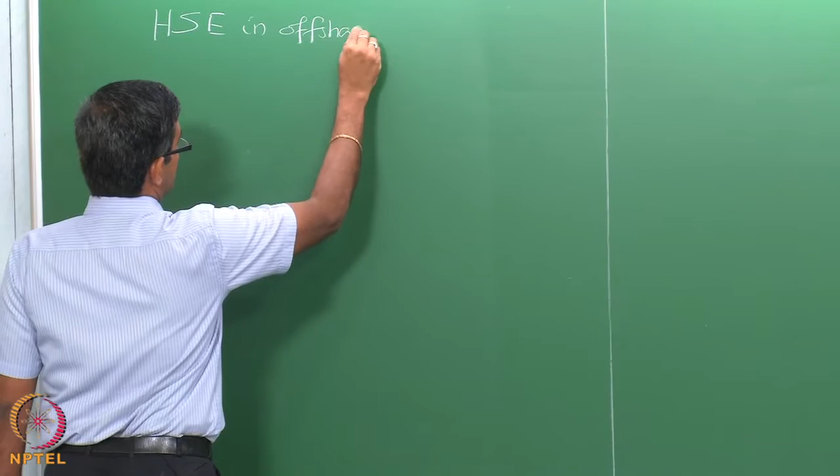Welcome friends, we are discussing the online course titled HSE, that is Health, Safety and Environmental Management in Offshore and Petroleum Engineering. We are now discussing through module 1, where we are going to discuss in detail the environmental impact caused by offshore and petroleum industries.

So, environmental management, in lecture 3 today we will talk about the consequences which essentially come from drilling accidents and how the drilling discharges can disturb the ecosystem balance in marine environment.

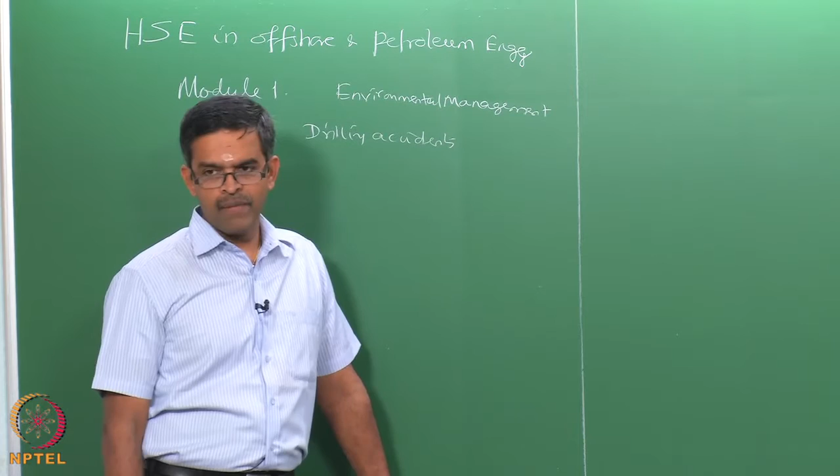In the last lectures we already saw various factors which actually affect the environmental impact caused by the activities in offshore and drilling fields. We have already discussed the different stages in drilling, exploration, production, etc., how in different stages we can have environmental impact caused to the marine ecosystems.

Now, to be very specific, let us now see how the drilling process alone can focus on the environmental issues or impact caused to the ecosystems.

Drilling accidents of course occur due to unexpected events. We know that drilling accidents are unavoidable. We can say they are unintentional. In real sense, they are actually accidents.

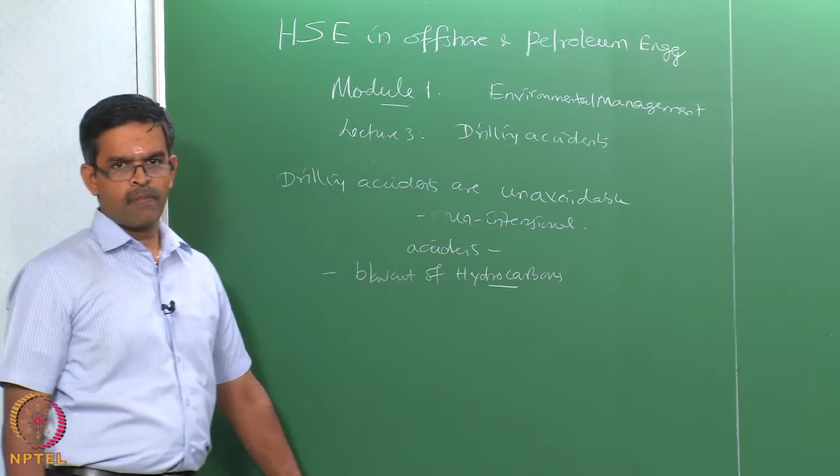But essentially they result in heavy blowout of hydrocarbons from the well. Of course, hydrocarbons and liquids, let us say, from the well. To be very specific, from the drilling wells, and the main consequence of such blowout is they result in very large oil spill.

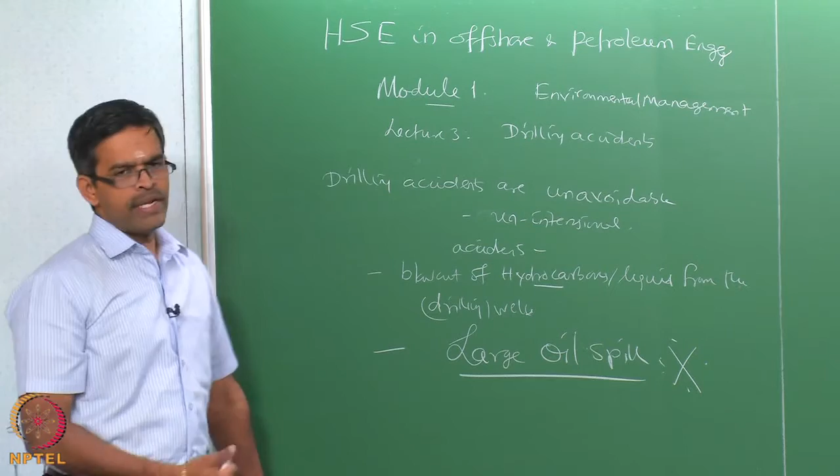That is one of the important consequences which arise from drilling accidents. Very interestingly, the literature data shows that one of the major accidents which is still being spoken of in the oil and gas industry, one of the major accidents which occurred near the shore of Mexico, in as old as 1979, was the blowout of the rig Ixtoc 1.

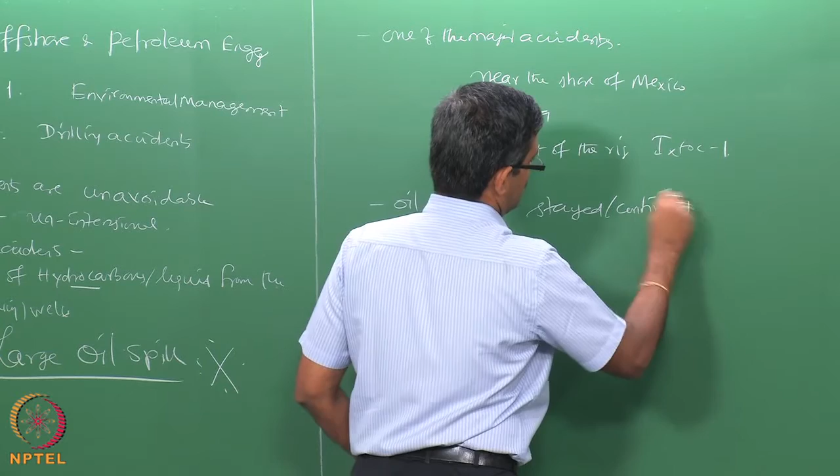The interesting fact, as you will be reading from the open domain sources, is that the oil spill resulted from this specific blowout stayed there, or let us say continued, for about 10 months. That is fairly a large period, and the quantity of oil which spilled out is about 3000, and somewhere the concentration is as high as 6000 tons.

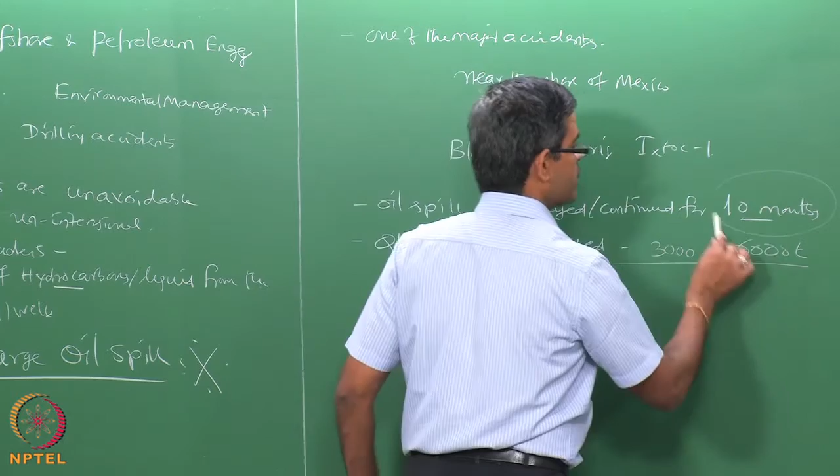So, one can seriously see the quantitative impact caused by such blowout accidents and the period with which it affects the ecosystem. So, both of them are equally important for us to really know the seriousness of any such consequences which occur from drilling accidents on offshore environment.

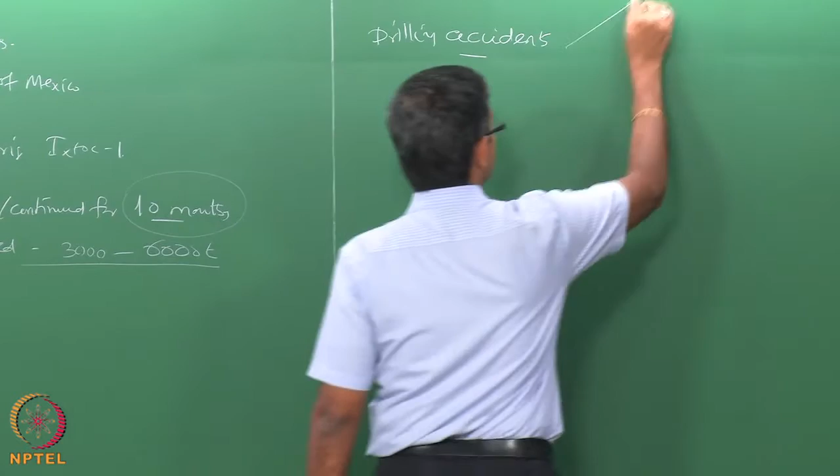Now, to understand this further better, let us classify drilling accidents into two parts. So, drilling accidents can be classified essentially into two parts: Class 1 type and Class 2 type.

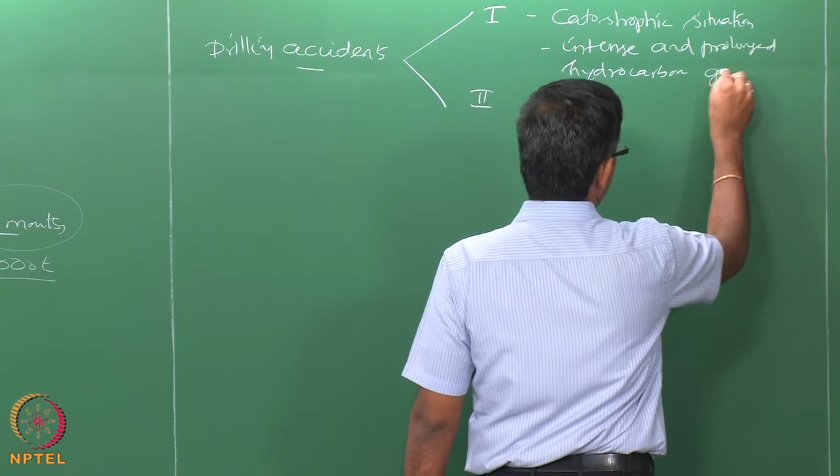Class 1 type actually refers to the catastrophic situation which involves very intense and prolonged hydrocarbon discharge. Let us say gushing. Gushing is a phenomenally high discharge.

The second class actually refers to a routine hydrocarbon spill. This essentially comes out during even the normal drilling operations. This is very common even during normal drilling operation. There is no reason that it should always happen only as an accident.

Therefore, the second class of drilling accidents is generally not frequently reported, because it is more or less a routine part of the offshore industry process. Moreover, it is also not responsible for causing serious pollution. So, they do not cause serious pollution.

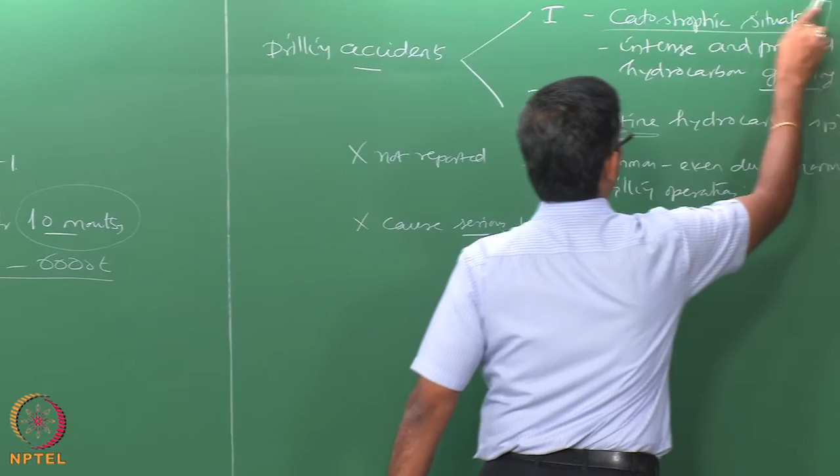So, we are more bothered about the intense and prolonged hydrocarbon gushing, which actually results in a catastrophic situation. So, when we say drilling accidents, we refer to type 1, or classification 1, of drilling accidents.

The next important source which actually causes imbalance in the ecosystem is accidents caused in underground storage reservoirs. We know offshore platforms are built for various purposes. So, offshore oil production systems, or let us say offshore platforms, are built for several functions.

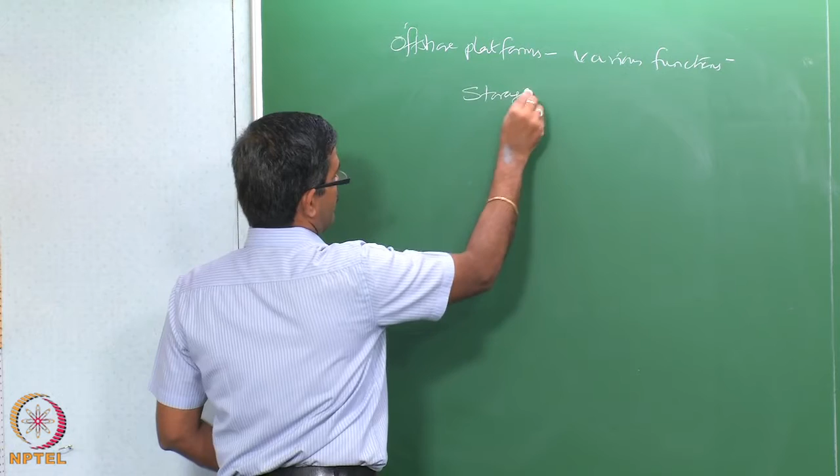Storage is one amongst them, but storage, if it is a part of the function of the platform, requires a lot of reserve space. Due to limitation in the reserve space available in the platform, especially in production platforms, in drilling and production platforms there is generally a limitation in storage space.

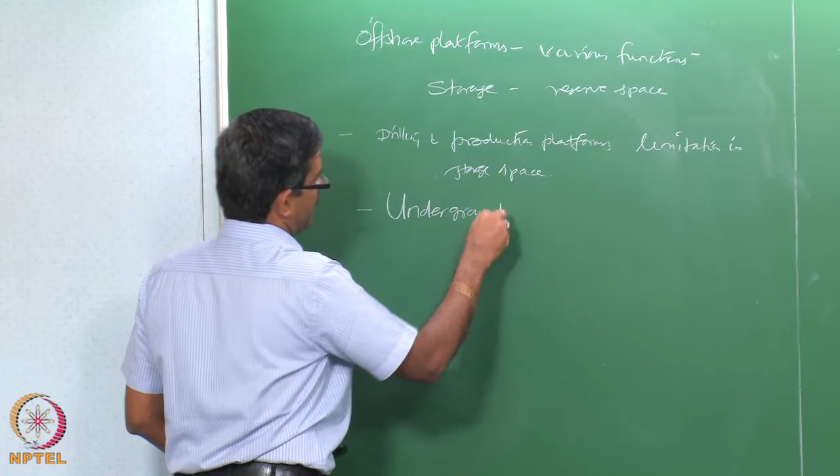So, to overcome this difficulty, people construct what we call underground storage reservoirs. Large tanks are constructed, which are actually commonly used in the present terms, because in the present scenario the production and drilling platforms, which are essentially semi-compliant in nature, have a serious limitation in terms of storage space. So, there has been an improved usage of underground storage reservoirs.

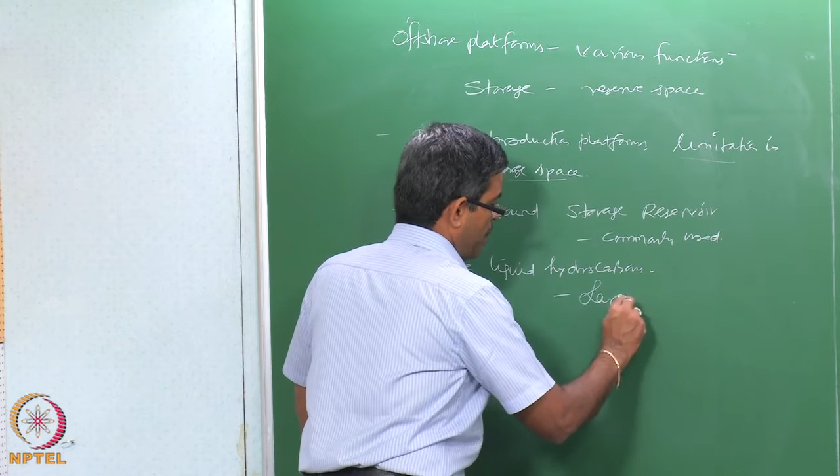So, essentially these reservoirs are used to store liquid hydrocarbons. They actually store liquid hydrocarbons. There is no harm in allowing them to store the hydrocarbon. The difficulty here is they store them in comparatively a large volume. That is the problem here.

They are used when tankers are deployed for oil transportation instead of pipelines. So there are two ways you can transport oil from the production platform to the shore for processing: either you use pipelines or shuttle tankers. Essentially, underground reservoirs are used wherever people generally use oil tankers or shuttle tankers instead of pipelines.

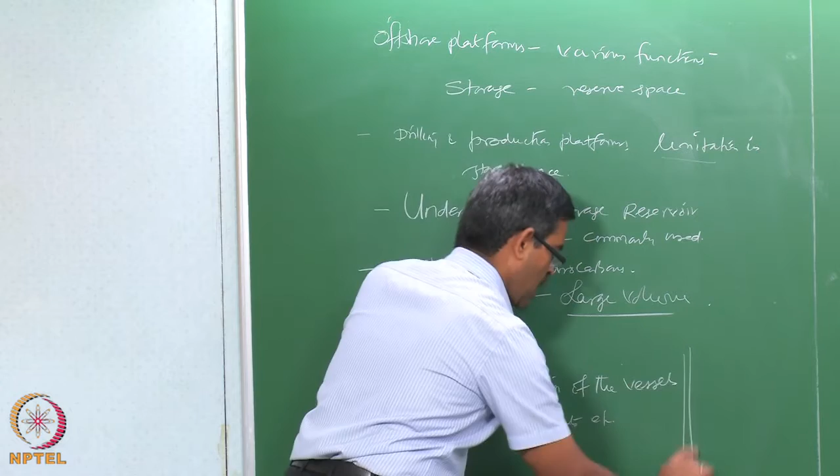Now, where do the risks arise when you use underground reservoirs? The causes for risks can be, one, due to collision of the vessels, that is the shuttle tankers, with the reservoir. There can also be collision caused by tugboats, etc. The occurrence of these kinds of incidents in the offshore industry is comparatively high.

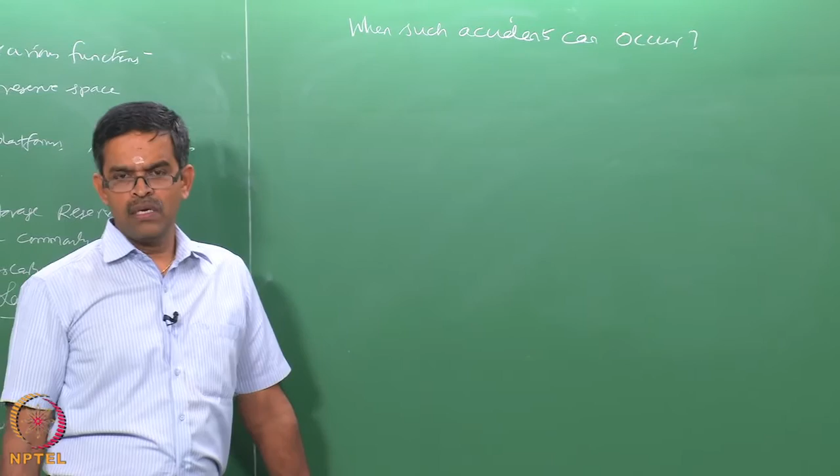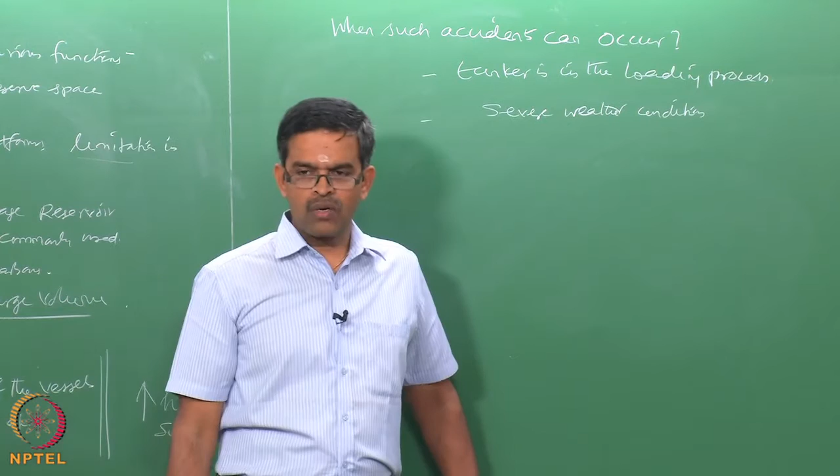Now, the question asked very commonly is, when can such accidents occur? The answer is simple. Such accidents usually occur when the tanker is in the loading process, or alternatively when there is severe weather condition, because during the loading process the tanker has to be enabled to come as close as possible to the reservoir.

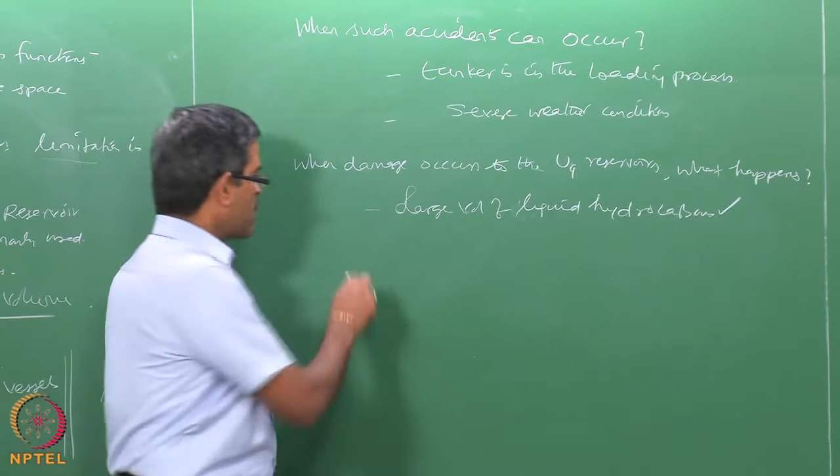Now the question comes, when damage occurs to the underground reservoirs, what happens? That is what we are interested to know. As I said in the beginning, underground reservoirs have a very large volume of hydrocarbons. So on damage, they will become a concentrated source of marine pollution.

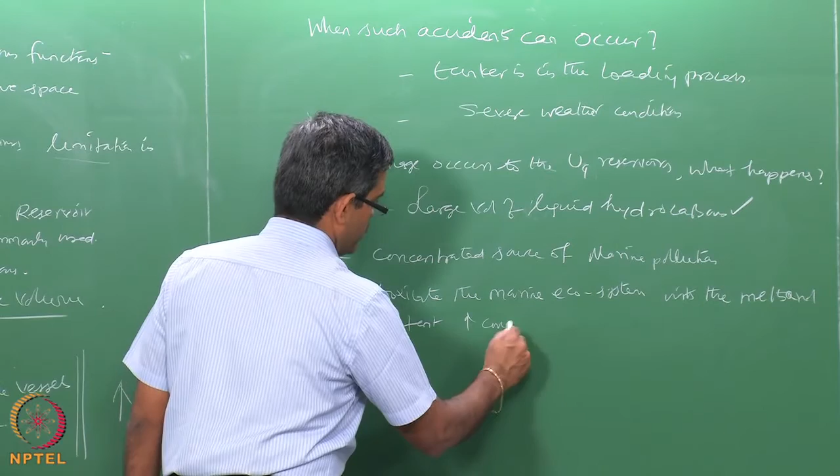Because this will toxicate the marine environment or marine ecosystem with high concentration of hydrocarbon content. That is one bad news.

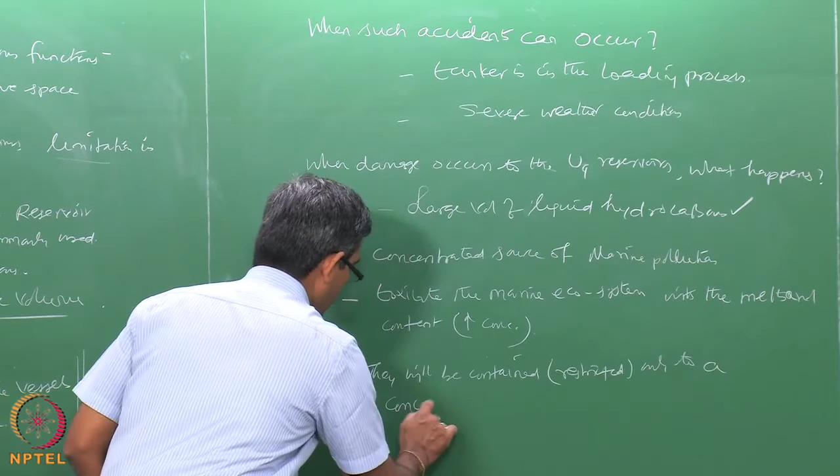Now there is good news here. The good news is they will be contained or restricted only to a concentrated area. They will not spread easily.

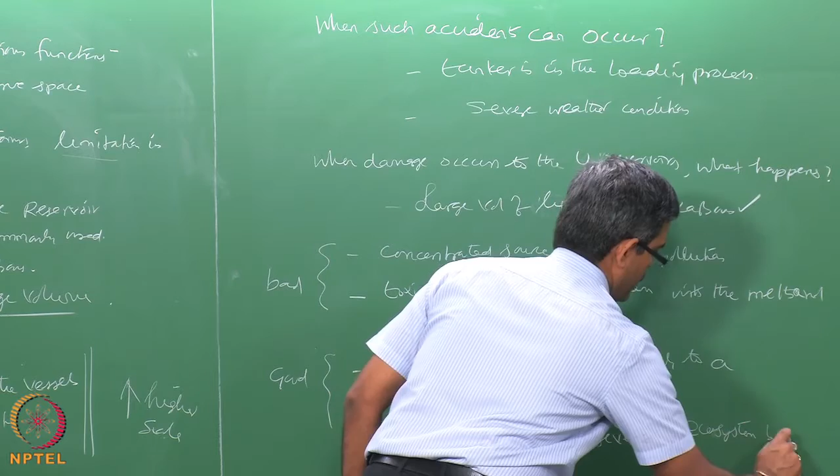But however, the extent of this pollution spread may not be large, but the concentration of pollution in that area will be very severe, which affects the ecosystem very badly. So therefore, it is a matter of concern for all environmentalists.

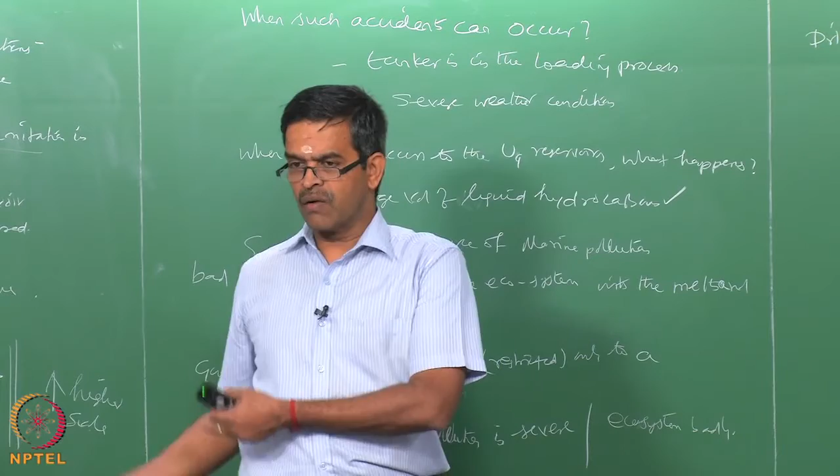Alternatively, you do not allow the shuttle tankers to transport oil from the underground reservoirs to the onshore for processing and discharge. Let us say I am using pipelines instead. Now let us see what are the consequences caused when you use pipelines for transporting oil from the underground reservoir or from the production platform to the coast.

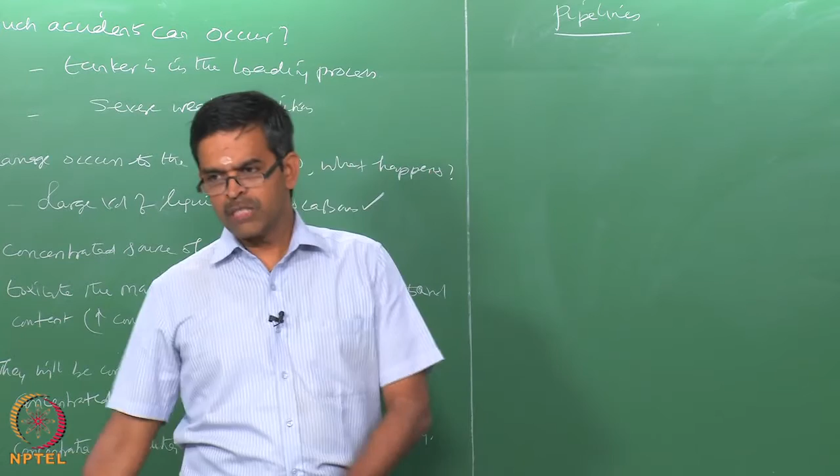They are also hazardous; they are not hazard free. Pipelines are generally used to transport the explored crude oil to the shore for further processing. We all know crude oil cannot be used as a commercial product, you need to process that. So you transport the explored crude oil from the production platform, because you cannot do the processing on the production platform itself, since space availability there is highly limited.

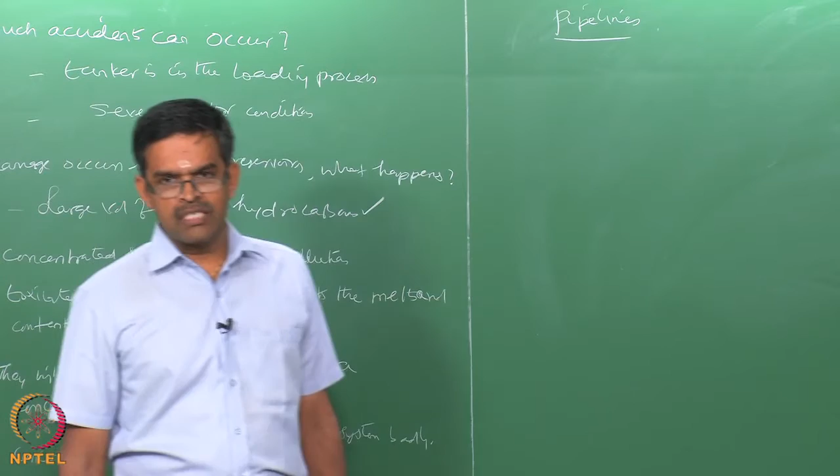Neither can you store this oil on the production platform, because the storage volume is also not available on such production platforms. So you need to transport it either on a daily basis or time-to-time basis from the production unit to the coastal side. Now, what are the complexities which arise essentially from pipeline usage?

The foremost complexity is the extensive length of the pipeline. Why are you bothered about extensive length? The moment you have extensive length, you have a lot of connections, and there is always a probability that these connections can be subjected to leakage.

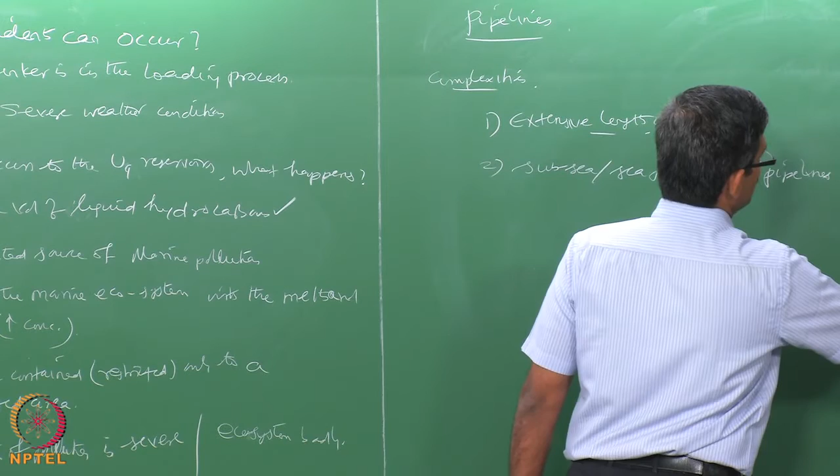The second issue is because of subsea or sea floor erosion, these pipelines are subjected to damage. So they can also result in leakage of oil directly.

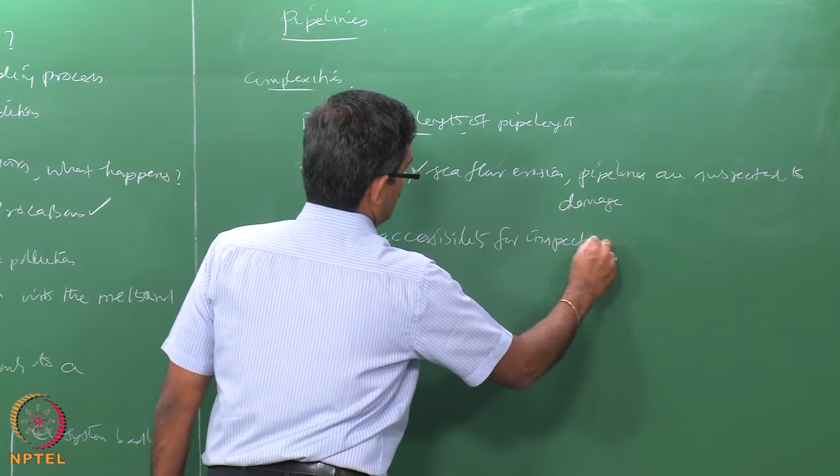Most importantly, these pipelines laid on the sea floor are not available for inspection, so there is inaccessibility for inspection until you actually notice a leak of high volume. So periodic maintenance of these kinds of pipelines against leakage is not a day-to-day affair, because firstly it is expensive, and secondly people actually do not plan for a continuous inspection process on pipelines.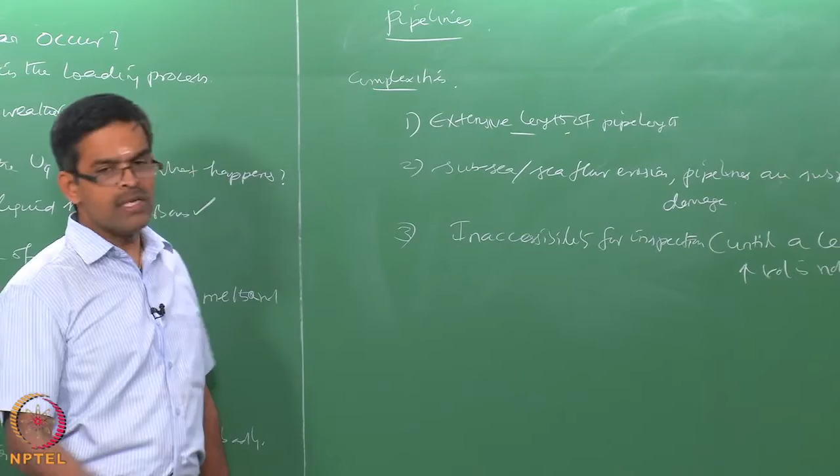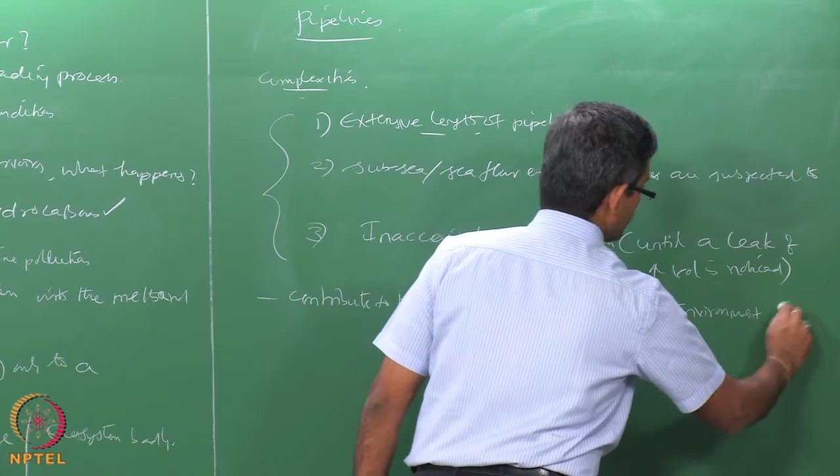So now, these three reasons which add to the complexities of using pipelines for transporting oil from the production unit to the coastal side actually contribute to the potential source of failure, which results in environmental imbalance to the marine ecosystem.

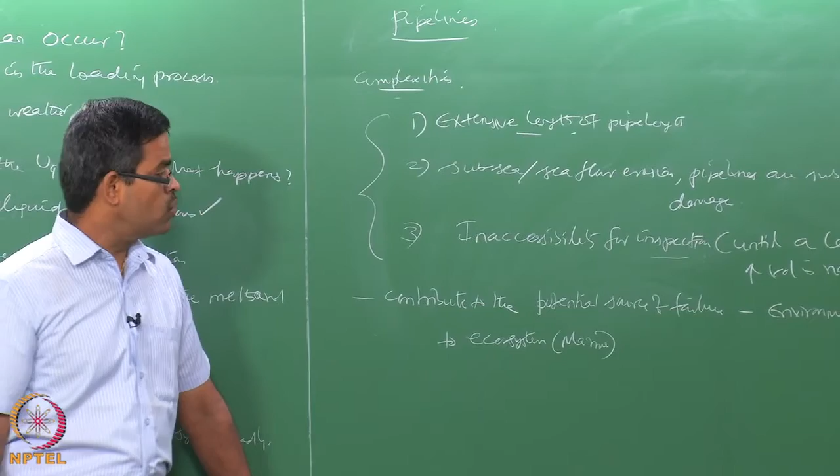There are other factors which contribute to the increase in the potential source of failure of pipelines. The other factors could be material defect, corrosion, tectonic movements—that is sea quakes or earthquakes in seabed—and encountering ships and their anchoring systems. That is a very important problem.

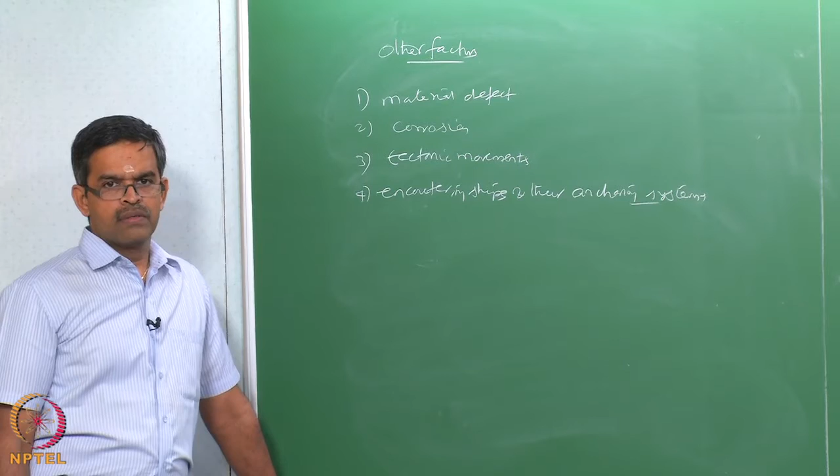Therefore, pipelines can cause a small to long term leakage, which is actually a botheration, because this will remain as a potential threat over a large period of time.

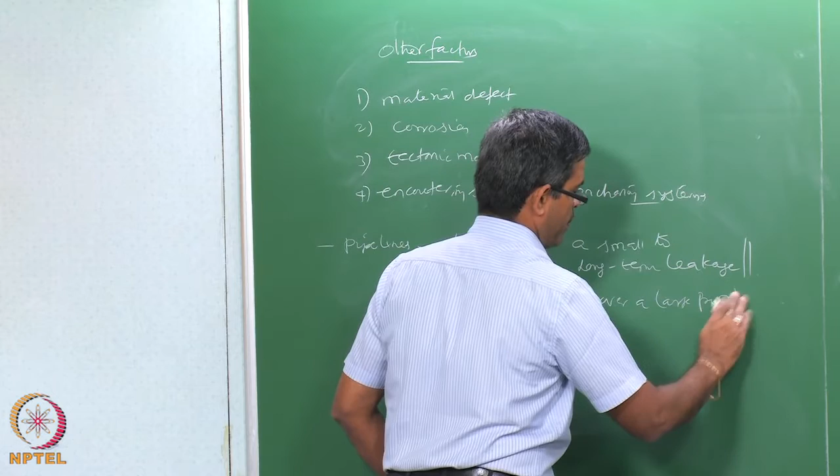Which is a problem. Now, what would be the factors or contributors which will affect the intensity and scale of the impacts caused by the pipeline failure? They vary depending upon the following factors.

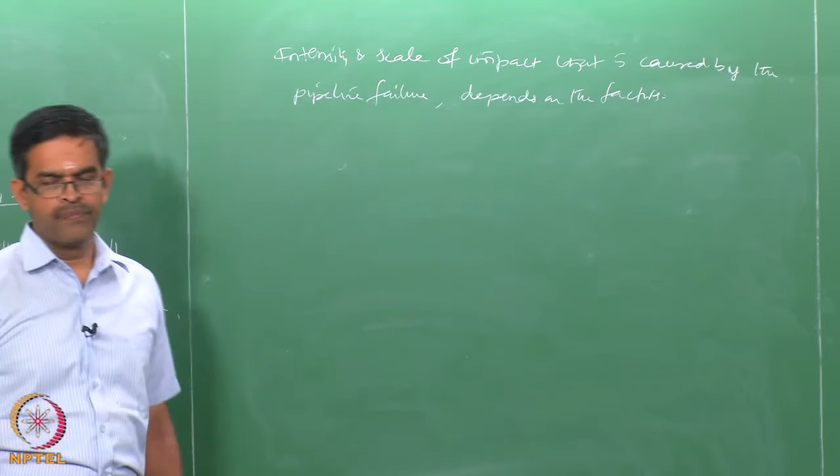Let us say, what would be the impact on marine pollution? There are several factors: length of the pipeline, volume of flow, temperature, depth of laying, material selection, and fifth, laying methods—because laying methods sometimes introduce residual stresses in the pipelines, which can be avoided if you are able to smoothly lay the pipeline on the shore.

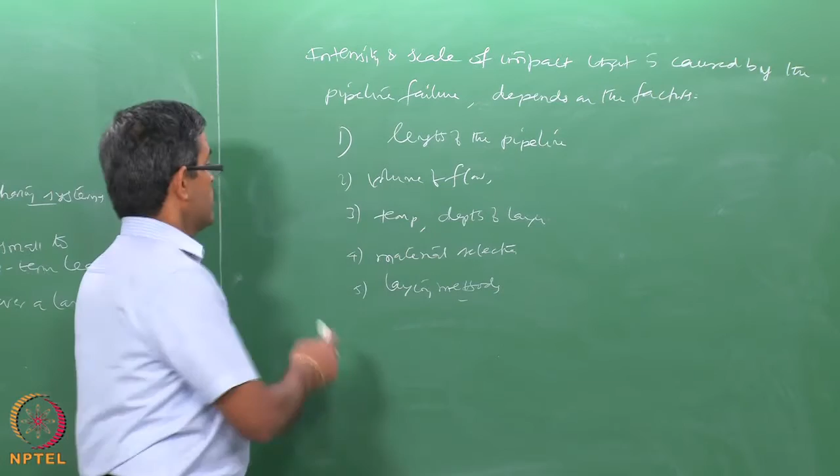So now we understand that either the underground storage reservoirs or the pipelines, which are essentially two means of collecting the exploited crude oil transported from the production unit to the coast for further processing, both methodologies have equal risks which cause impact to the ecosystems in the marine environment.

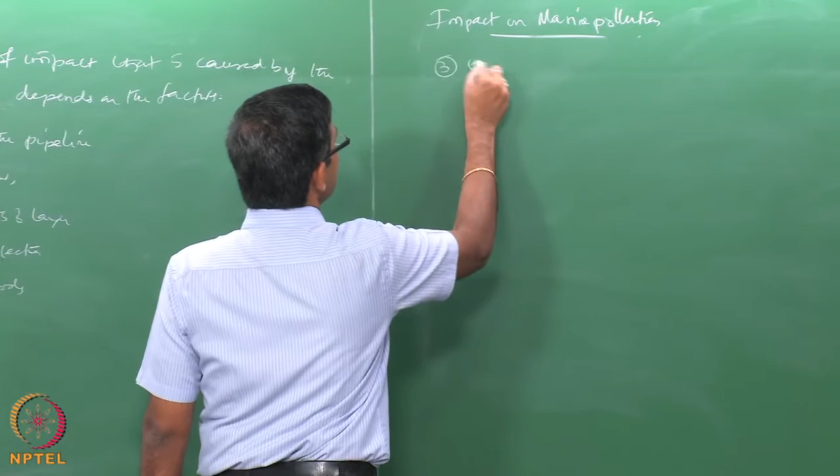Then let us see what is the impact on marine pollution. The impacts caused by marine pollutants are essentially three in nature. So there are three types of impacts caused: one, physical; two, chemical; three, biological.

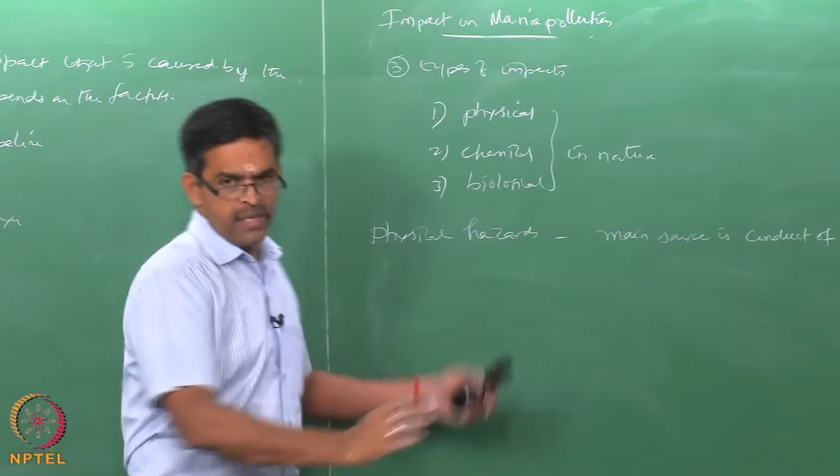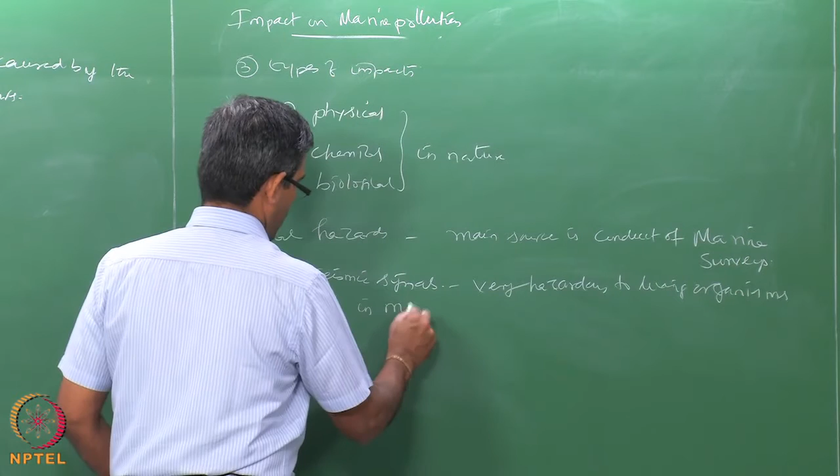In nature, physical hazards arise essentially during the conduct of marine survey. The main source is the conduct of marine survey. To elaborate, seismic signals, which are generally generated during the marine survey, are very hazardous to the living organisms in the marine environment. So the first source comes from the generation of seismic signals.

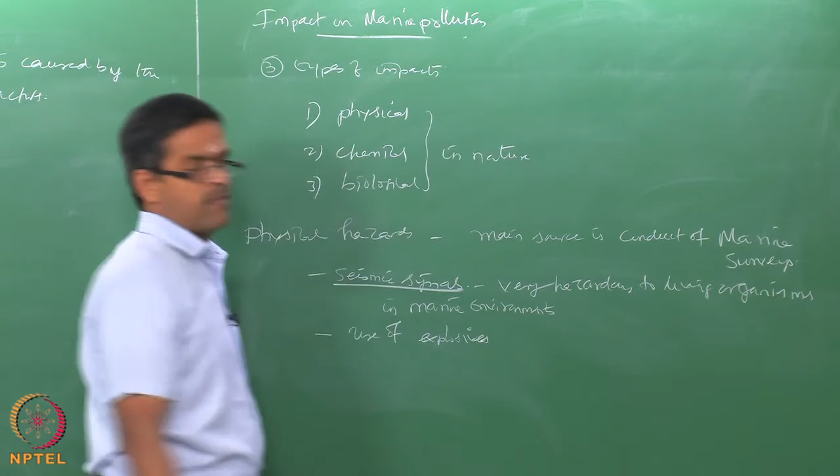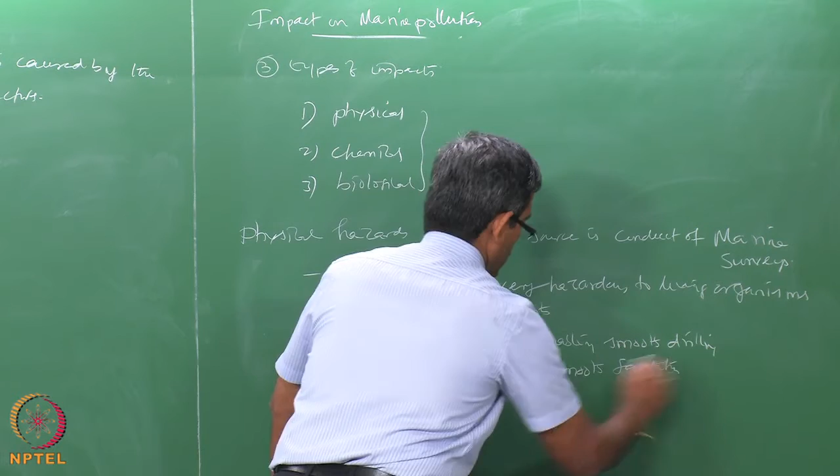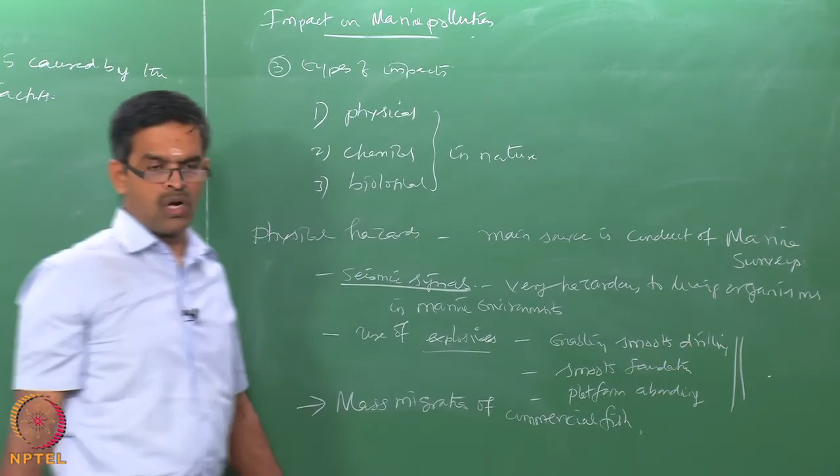The second could be use of explosive activities. It can be either for enabling smooth drilling, or for smooth foundation, or even for platform abandonment. In all these three cases, generally people use explosives. This will result in mass migration of the commercial fish from the source of the platform to a different location. That is the main reason why this results in a physical hazard, arising from drilling activity, which is one important type of impact caused in marine pollution.

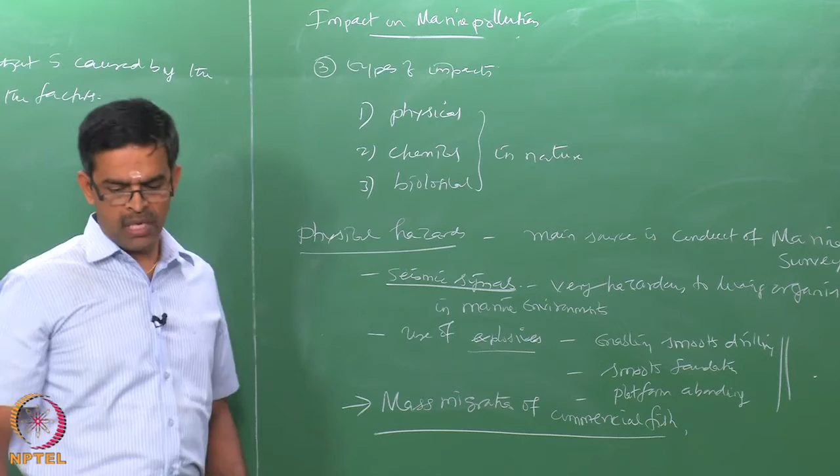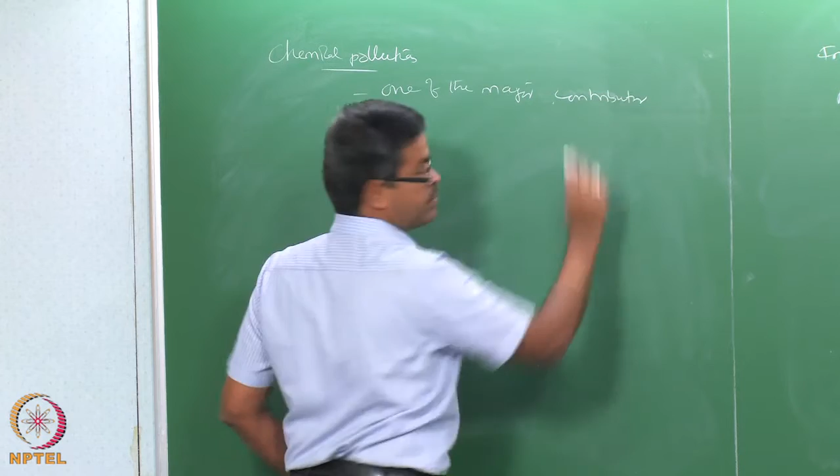The second, of course, could be the chemical pollution. As we have seen in the last lectures, we made a table to understand the different sources contributing to pollution in the marine environment. Chemical pollution has been seen as one of the major contributors of marine pollution. It is most important, causing a significant impact on marine pollution, because large offshore accidents have resulted in oil spills in the past, leading to very serious ecological consequences.

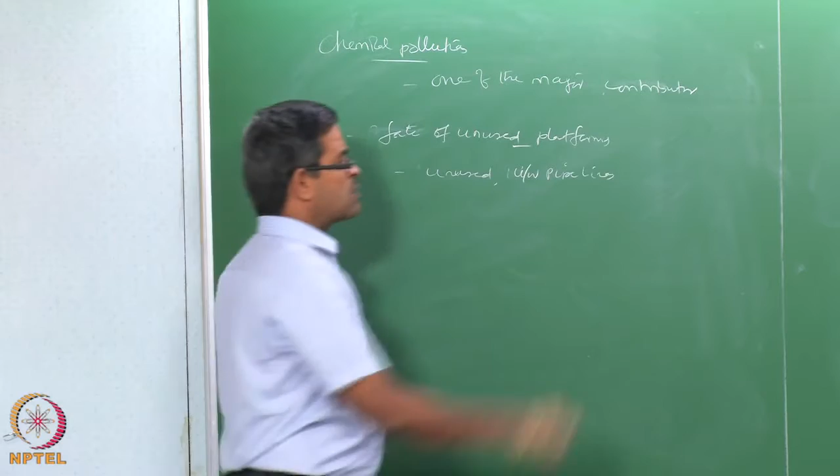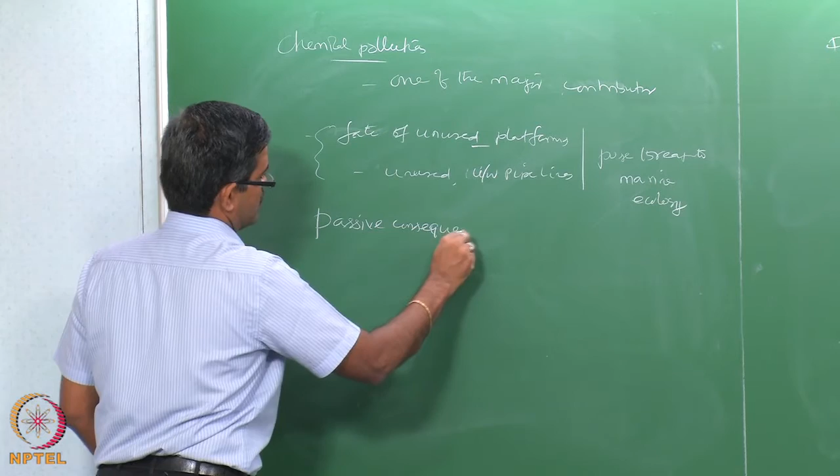And very importantly, the fate of unused platforms is a point of serious concern. The fate of unused underwater pipelines is another worry, and they actually pose a parallel threat to marine ecology. So we can call these passive consequences which arise from offshore drilling activities.

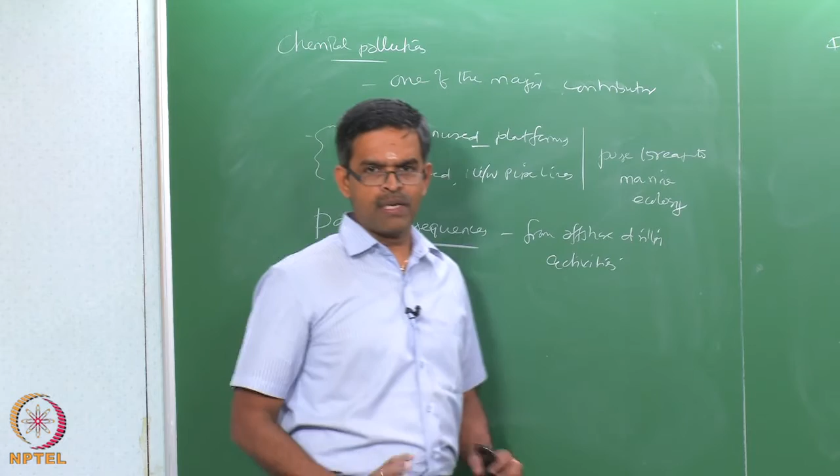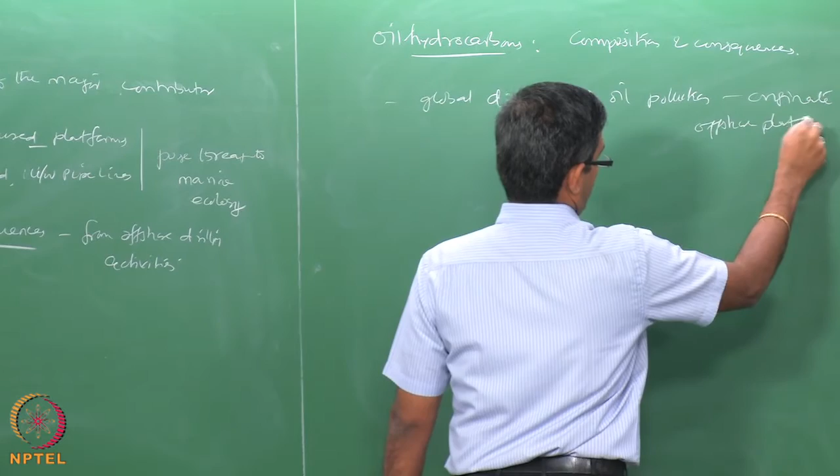Let us try to understand the composition and consequence of oil hydrocarbons separately in detail. Based upon literature review conducted by various researchers in the recent past, one can easily see that there is a global distribution of oil pollution which essentially originates from offshore platforms. In the last lectures, we already discussed the local, regional and global effects of different elements present in the hydrocarbon. However, in general, literature studies very clearly indicate there has been a global distribution of oil pollution originating from offshore platform sources.

Having said this, let us now talk about the concerns in terms of scale and consequences of pollution, which are increasing in the last few decades. We all agree that oil input is undoubtedly seen as one of the serious threats to the marine environment. Let us talk about input composition, let us say crude oil.

Crude oil has a wide range of differences in properties which lead to physical fractionalization of crude oil in the ocean environment. The moment crude oil mixes in the ocean environment, it gets disintegrated, what we call physical fractionalizing, which causes impact to the marine environment in different forms.

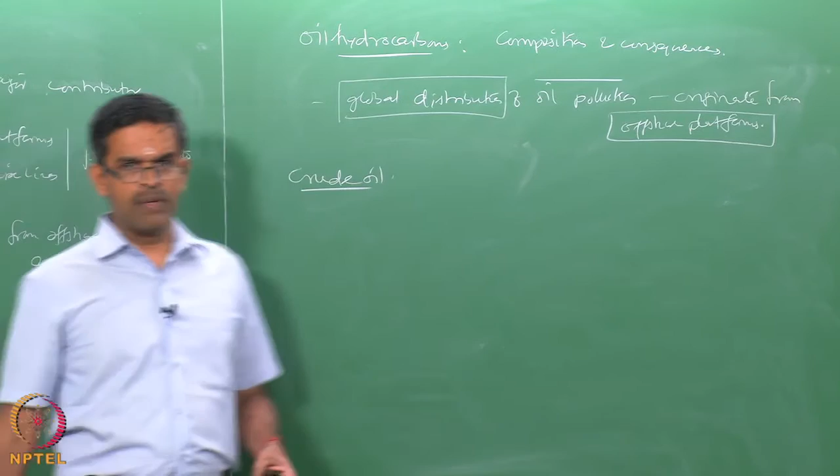Crude oil contains hydrocarbons with a hybrid composition such as paraffins, naphthenic, naphthene aromatic compounds, and these compounds present in crude oil are essentially sources of marine pollution.

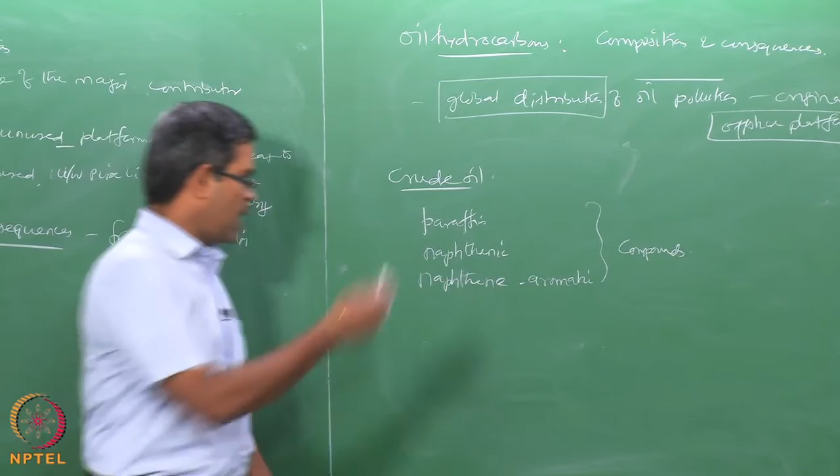The complexity is actually in studying their behavior and biological impact. They are governed by physical and physiochemical properties, so the behavior of crude oil, which is essentially required to study its impact on the marine environment, depends on various factors.

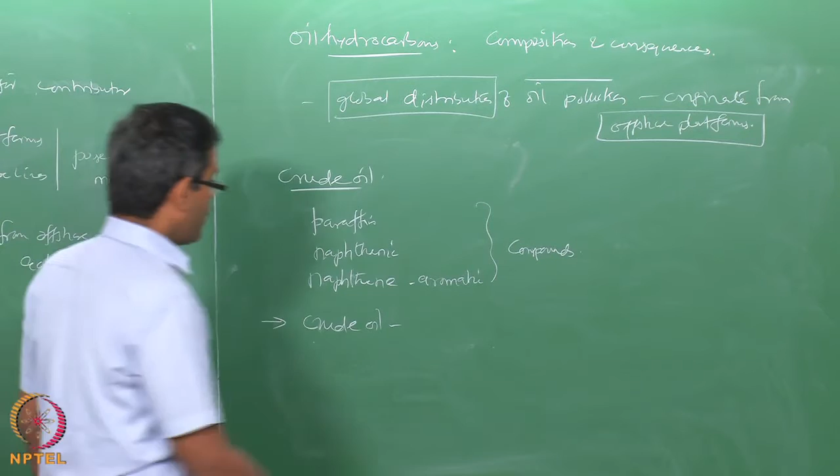These factors globally are physical and physiochemical in nature, governed by certain specific characteristics. One is the specific gravity, two is the volatility, and three is the water solubility.

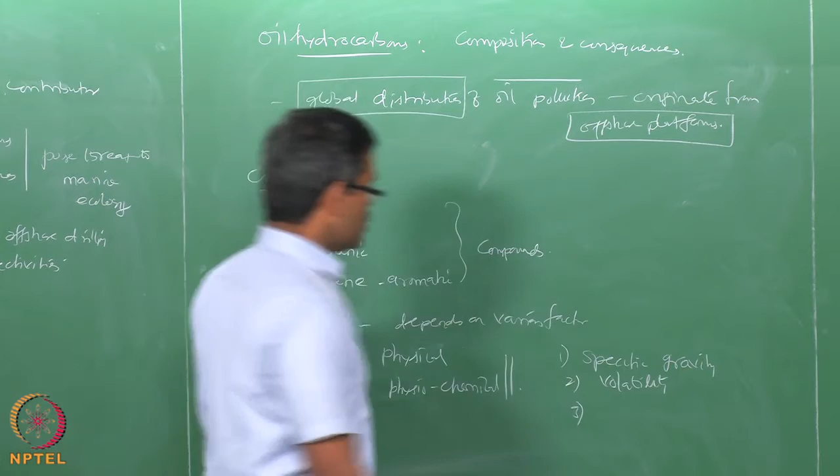Now, if you look at crude oil from a different perspective, it is present in the ocean environment in different forms. Each form has a special kind of threat imposed on the marine environment. Let us see what these forms of crude oil are.

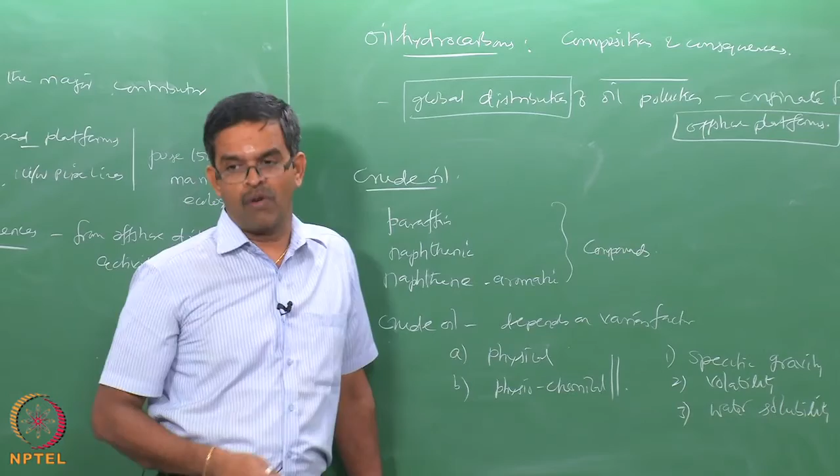Crude oil is present in different physical states. It can be present or seen as surface films. It can also be seen in dissolved forms. It can be seen as an emulsion, essentially oil in water or water in oil. It is available in both forms.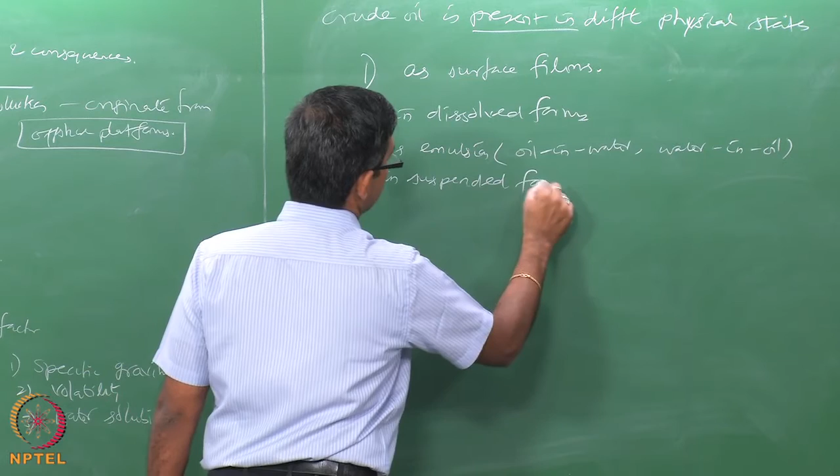It is also seen in suspended forms. It can also be seen as an oil aggregate that floats on the surface.

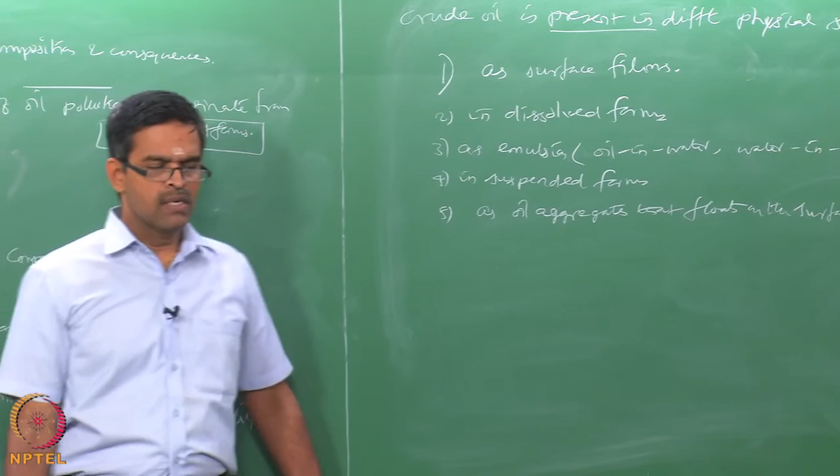Their fractions are generally absorbed by suspended particles. The solid and viscous components get deposited at the sea bottom, and other compounds get accumulated in the water organisms. So they get dispersed in different forms.

Some of the fractions will be absorbed by the suspended particles present in the marine environment. The solid and viscous components will get dissolved and deposited at the sea bottom, whereas other compounds will be accumulated in the water organisms, and they create lots of parallel serious threats to the marine ecosystem.

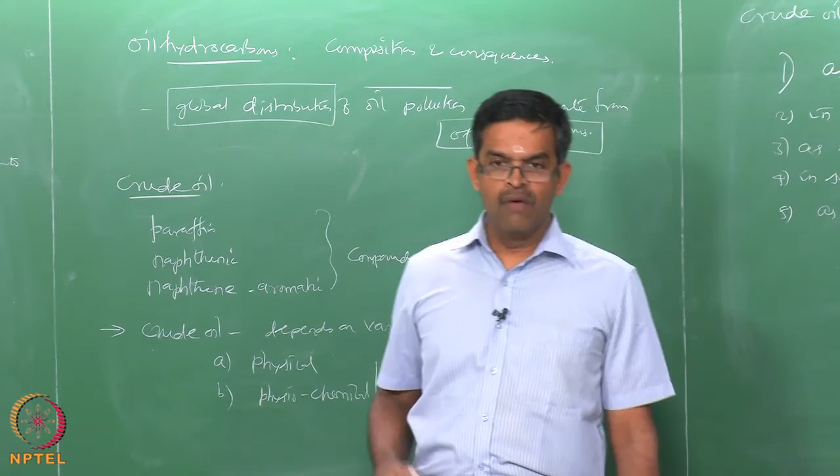Now, the question comes: if we all know that crude oil of different content, present in both physical and physiochemical properties, contributes seriously in different forms to marine pollution, can we detect them? Can we foresee them in advance? What are the problems when we identify or try to detect the oil content in marine pollution?

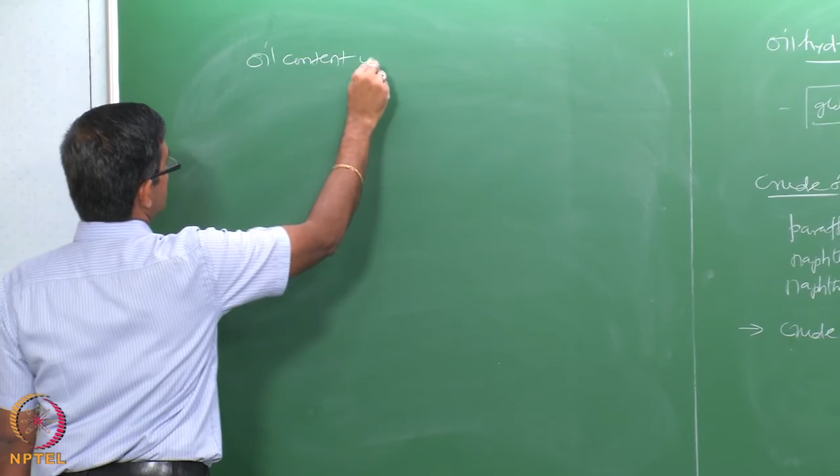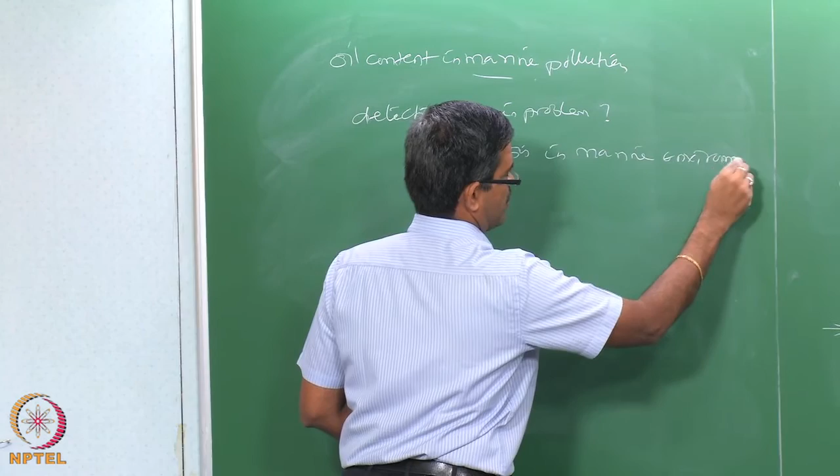Presence of oil content in marine pollution, detection of this is a main problem. The question is why? Because the presence of this in the marine environment is exactly similar to that produced by marine living organisms. So it is very difficult for you to identify whether the source is from crude oil generated from the platform or from marine fauna and flora. So detection becomes even more difficult.

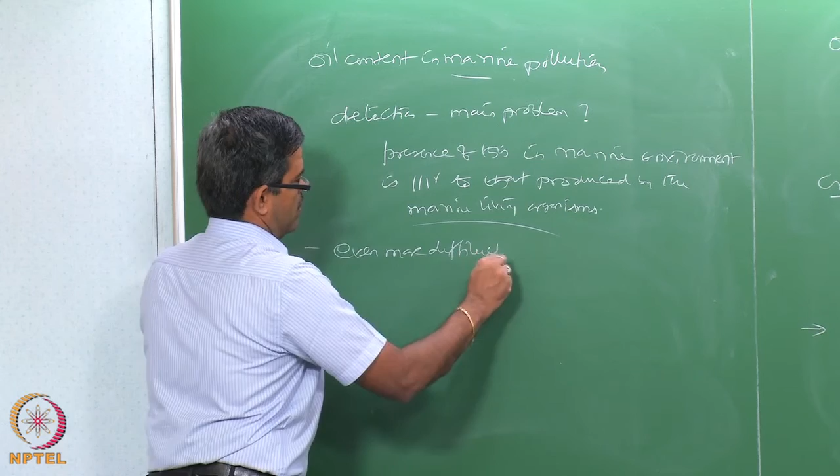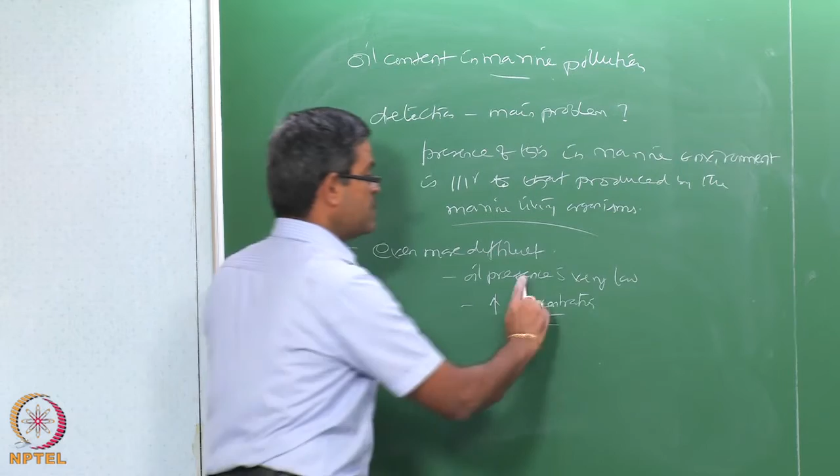Detection is difficult when the oil presence is very low, or with very high concentration. The concentration can be high, but the presence is low. If this combination occurs, detection becomes much more difficult.

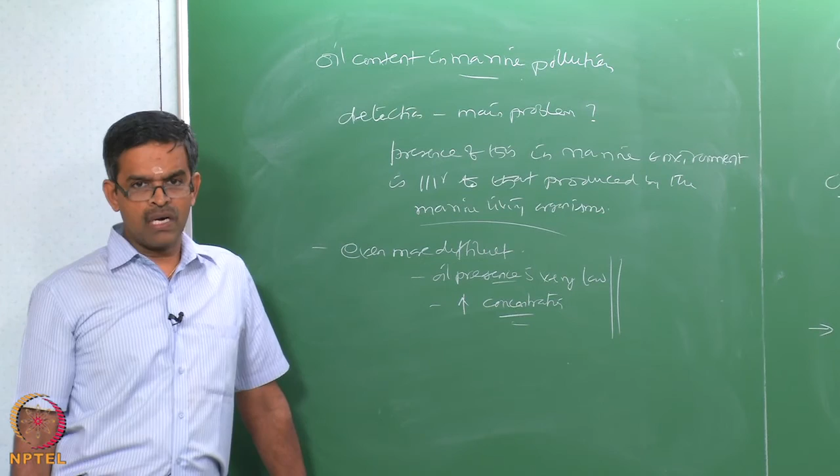So one can always study the progression, duration and results of this transformation, because they depend on the properties and composition of the crude oil. The oil which is spread on the free surface, which occurs under the influence of gravitational forces, can always be blocked, and the oil spill can be prevented by mechanical means, which we will see in the successive lectures.

Now let us try to understand oil spill as a physical review. Oil spill actually undergoes various stages, and in each stage it pollutes the marine ecology very significantly. What are those various stages which an oil spill undergoes?

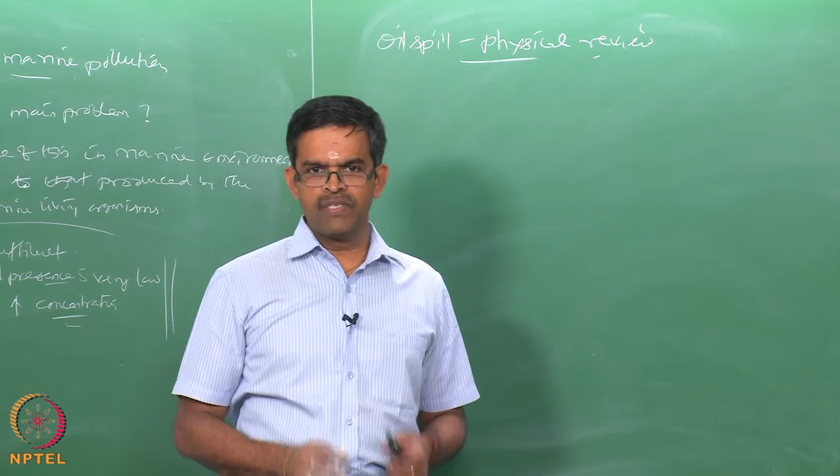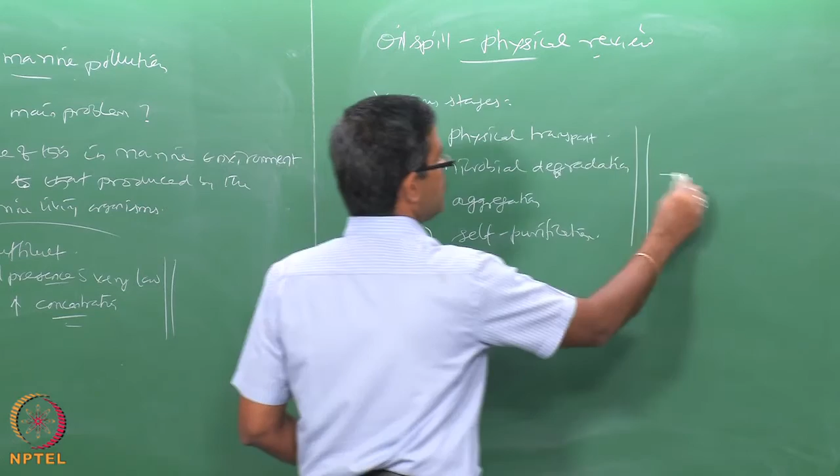The various stages an oil spill undergoes could be physical transport, during which it also pollutes. The second could be microbial degradation. The third stage could be aggregation, and the fourth could be self purification. During all these stages, it pollutes the marine environment significantly.

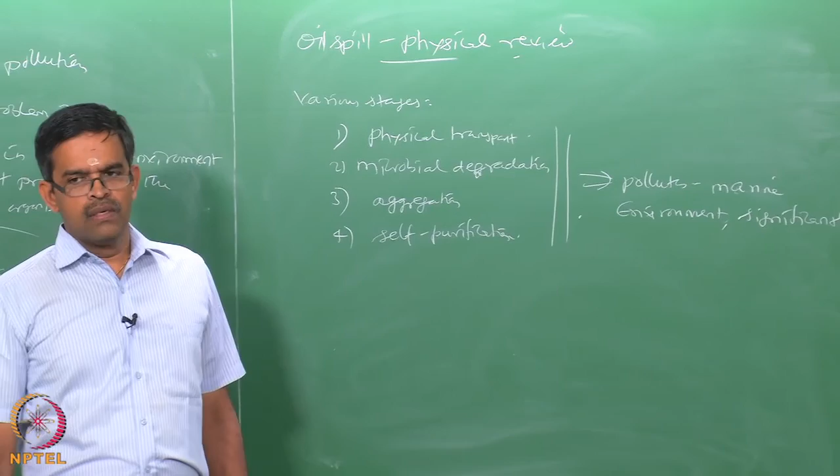So we will talk about the mechanical methods by which an oil spill can be contained and controlled, and what are the further difficulties leading to association or detection of factors which result in biological ecosystem imbalance, which are sourced essentially from oil and gas industries alone.

So in this lecture we talked about oil spill, we talked about drilling accidents, we talked about the complexities arising from the crude oil's presence in different forms, and we also discussed how an oil spill in different stages is going to affect the marine environment. Thank you very much.